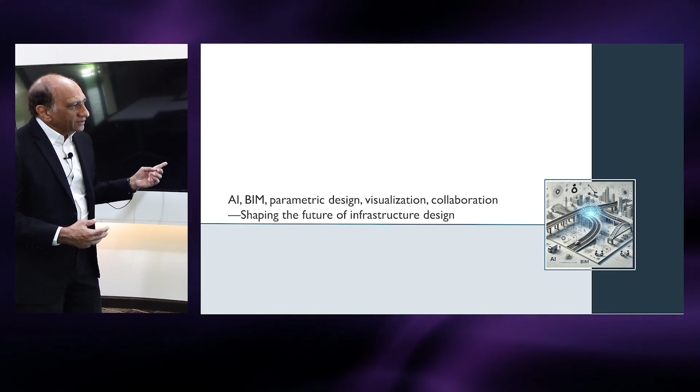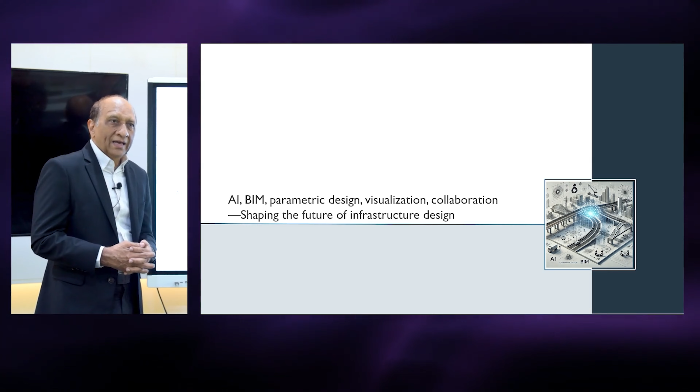For that, the key technologies that are now affecting all of this work, we can summarize them in AI. Of course, we all know that there's a big impact of AI right now. Building information modeling and also bridge information modeling, BrIM, both of them are important. Parametric design is very critical because now we have moved from traditional drawing-based models to parametric models. And then visualization of those models using digital technologies as well as collaboration with others. So these are the key technologies shaping the future of infrastructure design and, more importantly, bridge design, which is the focus of our talk today.

Now, bridges, as we all know, are an essential part of the infrastructure. In fact, probably one of the most visible parts of infrastructure, both symbolically and functionally, because whenever we have to cross any river, or we have to construct elevated expressways, or even for the waterways, we need bridges. So bridges are a very important component of physical infrastructure.

Now, a bridge project is a complex one, like any other project, but I just want to spend a couple of seconds on this one. If you look at a bridge project, we have to look at the construction method, the life cycle, the structural forms, the material, components, stakeholders, use of the bridge, and analysis and design, which is the main function of the structural engineers. And each one of them can further be expanded into more specific types.

So if you look at the entire project, it's pretty complex, and it is not practically possible to develop tools that will handle all of the bridges, of all of the materials, of all of the types, for all of the stakeholders. The system would become not only very complex, but not usable, because not everybody is handling all the steps at the same time. So that's why we will focus on application of the technologies on a specific type of bridge here, just to demonstrate how they are applied.

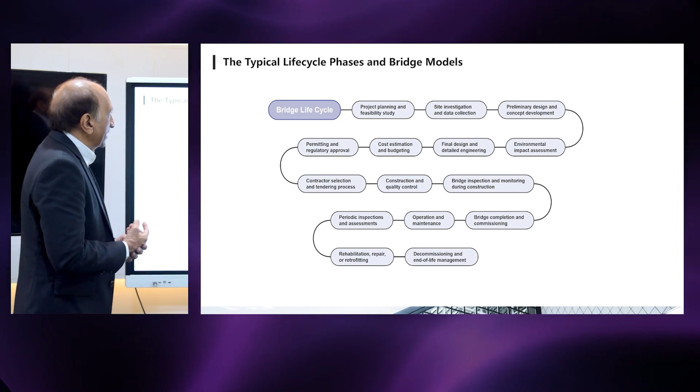Now, before we do that, let me quickly take you through the typical life cycle and phases of a bridge model, how it is developed. You can see from here that we start the bridge with planning and feasibility studies, site investigation, preliminary design, environmental impact assessment, detailed design, many approvals, construction, quality control, management of the bridge, and operation, as well as inspections and assessment. And finally, we may have to do some rehabilitation and end of life.

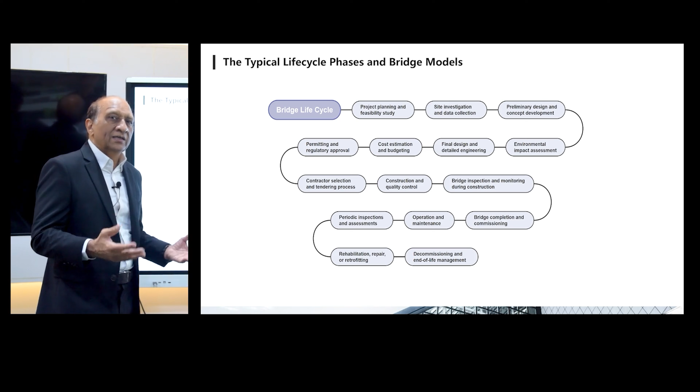So it's long, maybe spread over 100 years or more. So the bridge life cycle is pretty long, and most of these steps are integrated and handled by the agencies responsible for maintaining infrastructure.

And the design process, we can see that there are so many people involved in this one also. So the professionals and the stakeholders that are involved at every step are many, and all of them need to have access to information, and all of them add to the information, they use the information from previous life cycles, and they communicate, and they do their own part in the overall project.

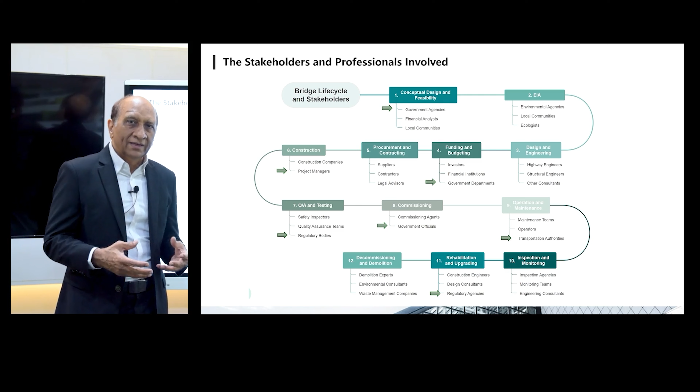So traditionally, there's a lot of documents that are shared both in printed form or in different documents in Excel, in Word, in AutoCAD, and in analysis models and in financial models. But ultimately, the information needs to be integrated. And now that we have this digital era, it's a great opportunity for us to build the entire information from a single model. So to do that, I want to demonstrate this on a simple bridge first.

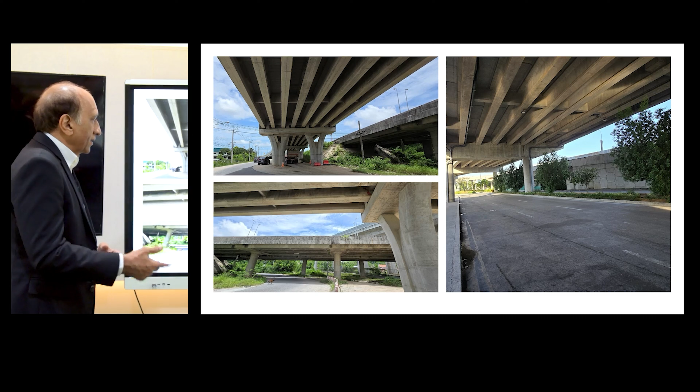And we are going to take the example of a concrete I and T girder bridge, which are very common. As you can see, when you travel around, you see these bridges, especially in rural areas and even in urban areas where they are used to build expressways and also waterways and so on. So we can see many of those.

Now, if you look at the design workflow for a typical bridge, you can see that we start with the alignment. That means it is given by the highway engineers. Then we have a design brief for the bridge. What kind of bridge? What do we want for this bridge to look like? Then system selection, and that is a very critical part. How do we choose the right system for that bridge? How many spans should we use? What girder types we should use, and so on.

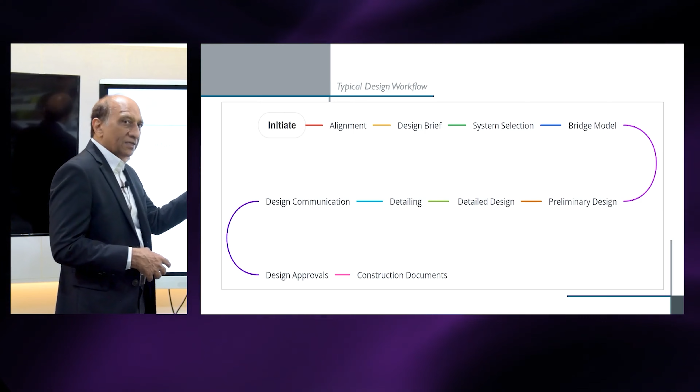And then we create a bridge model as a structural engineer and the bridge engineer. Then we do the preliminary design of the components. Then we do a detailed design. Then we do the detailing, reinforcement detailing, joint detailing and connection detailing. And then we communicate this information to the authorities, to the other stakeholders, to other professionals, and then we get the design approvals, and finally the construction documents are made and the construction commences.

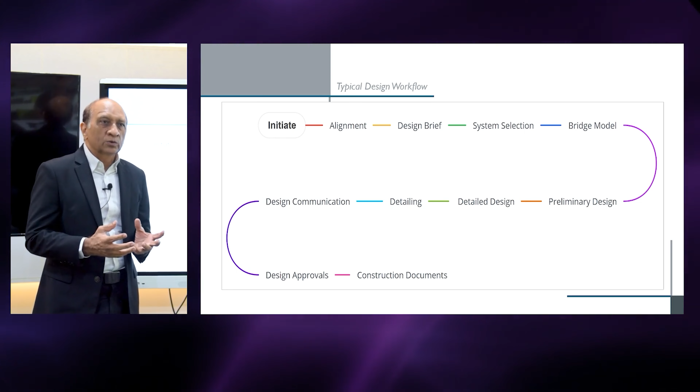So I'm looking at this design process, this workflow, which we can digitally integrate if we have the right information to start with. To do that, I will take the example of a new program that we are launching next month, and this is called CSI Bridge Express. So CSI Bridge is an existing program. In fact, it was developed about 20 years ago by Computers and Structures Incorporated in the US, and now we are working on the second generation of this program, in fact, adding on to that one, which is called Bridge Express.

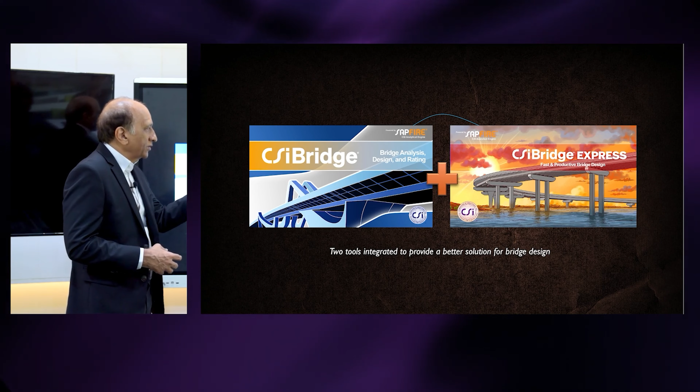And Express means that the workflow is faster and smarter, and these two programs can work together. They're about 20 years apart. This was in 2004, and this one is in 2024. So we can see how the technologies have changed. So let me start with this one.

The first thing that we need to do for this to happen is we must have a geometrically complete model. Normally, structural engineers start with a structural model, and that is not good enough to handle all aspects of the design because it doesn't have all the information. They only have the information necessary for analysis, which will be simplified and may not represent the physical character of the structure. So we should start with a parametric definition of the bridge, and that's the important part.

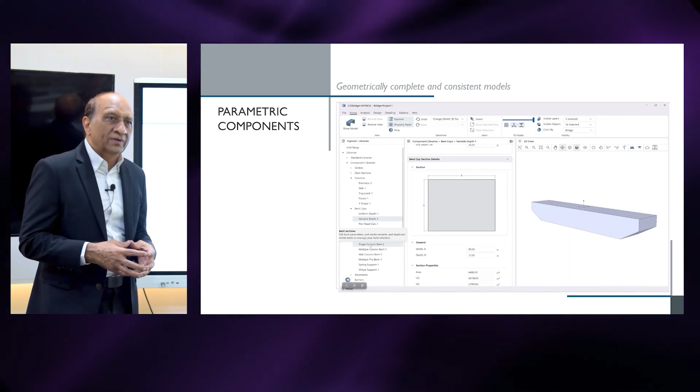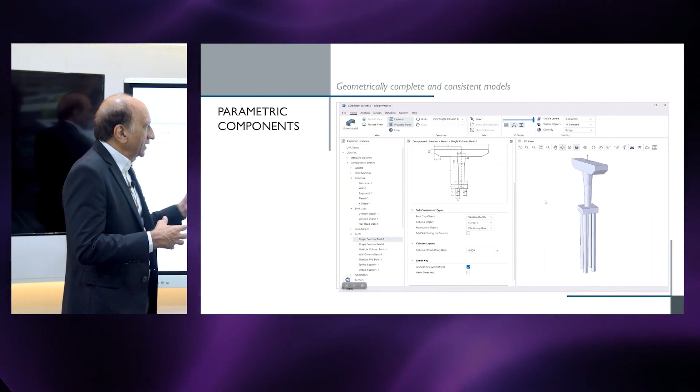So what I'm showing here is how you can define each component of the bridge using basic parameters, and then gradually use them to build up more complex components. So starting from the capping beam to the column, and then you build up the bents, and then you add the foundation. Various types of foundations can be modified. You can change the parameters, and everything gets connected.

So this parametric modeling is now quite common. There are many tools available, but here, instead of using external tools, we basically embed all of the parametric modeling into the program. So that's the first thing. The next one is that we use that information to create the whole bridge.

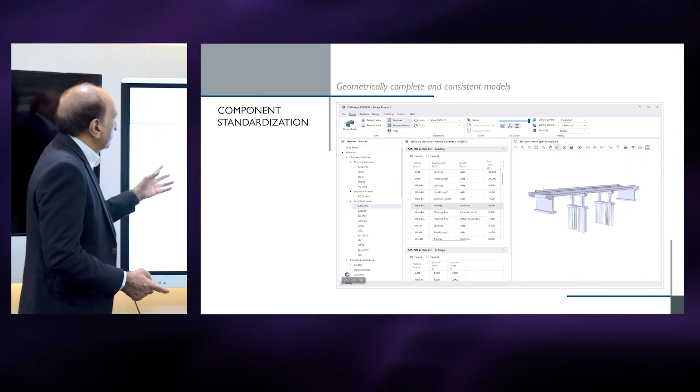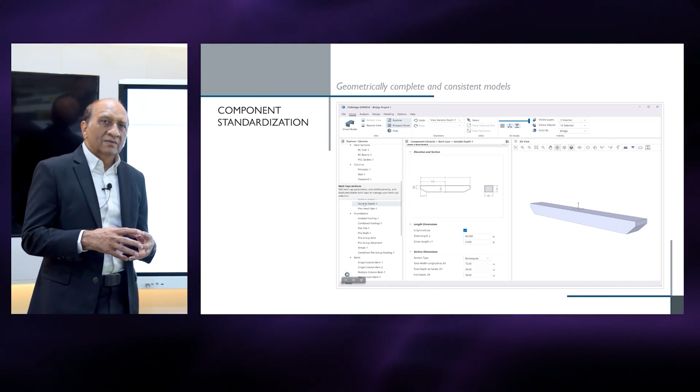So we can standardize those components, and we can save them into libraries so they can be reused. And that is the biggest advantage of parametric components, that once they are defined, they can be used across projects, across departments, across countries, across the various consultants, because ultimately there are not a lot of variations in most typical bridges. Of course, there are special cases where they can be modified.

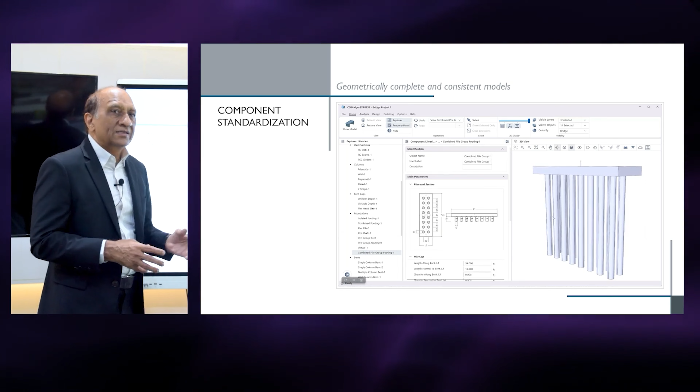So if a department is responsible for designing these bridges, they can accelerate the design considerably by standardizing them and saving them into the libraries, and then those libraries can then be used in the bridge. So like for example,

And then, more importantly, in the parametric definition, we can also add the reinforcement right from the beginning. This is a major change from the traditional design workflow where we wait for the analysis and design to be completed until we decide on the reinforcement. But as most of us know, we have been involved in design for a long time.

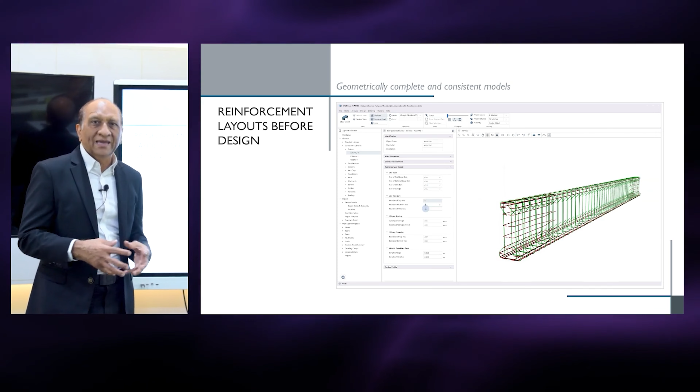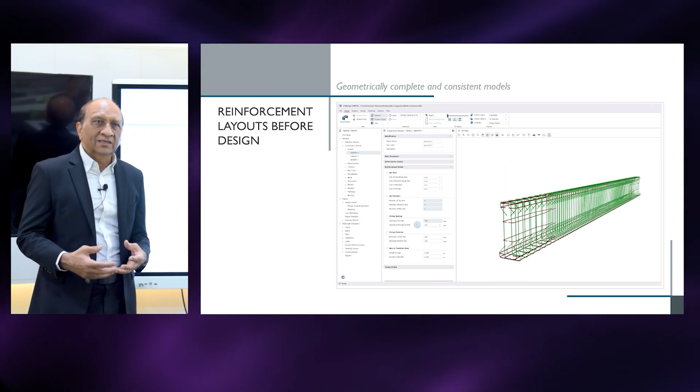We know that the reinforcement cage is basically a property of the component, and mostly it is governed by basic detailing rules. It is governed by the geometry. It is governed by the practicalities and construction practices. And of course, the reinforcement size, bar diameter, spacing will change, but the basic configuration will not change much.

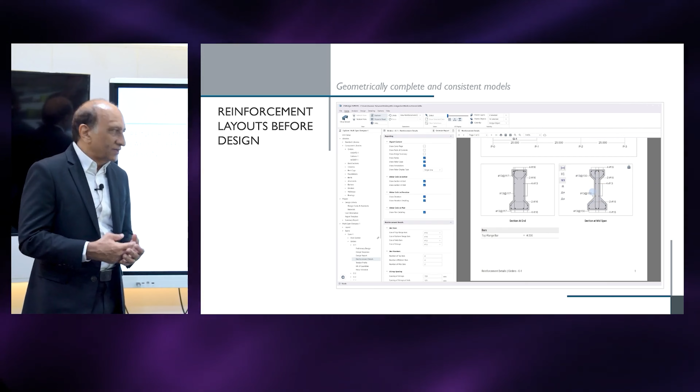So that's why we have added the reinforcement right into the component definition, so they are available as soon as the bridge component is defined. Reinforcement is all directly available. And then we can use all this information, the parametrically defined model components and the standardization, and construct a full bridge model very quickly by simply selecting the appropriate components on an appropriate alignment.

And we can just select what type of bent we use, and then what kind of bent cap we will use, what kind of foundation we will use, because it's all been defined and stored as parametric components. So we get the parametric models, and then you can see from here the abutments can be modeled, and we can complete the bridge by simply changing a few parameters.

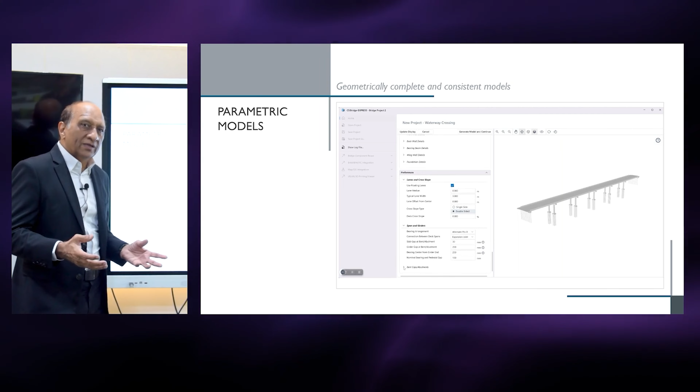This helps us to create a typical standard bridge in less than 15, 20 minutes. Of course, complicated bridges can be edited later, but most typical bridges will take a few minutes, less than an hour in any case, to create the model. And this is a much faster way than defining the models individually. So you can see it from here.

And another advantage is that once we create these parametric models, as you can see here, they're geometrically very, very complete in the sense that they incorporate all of the construction details right from the beginning, and they are transferred to the structural analysis model. You can see from here that we are modeling the bearings and the girders and the variations and the expansion joints and the half girders and everything, and then that goes to the analysis shell model or the solid model on the right hand side, which is geometrically consistent and complete.

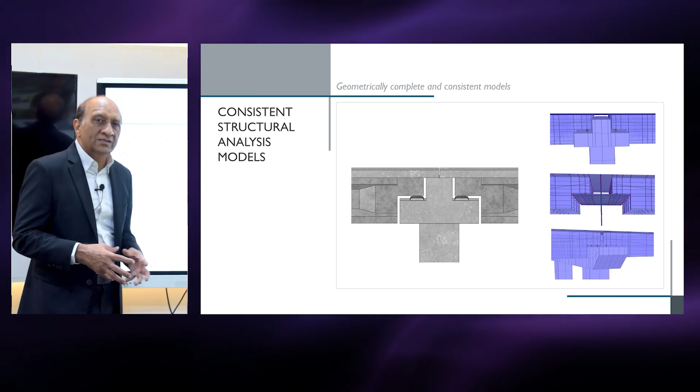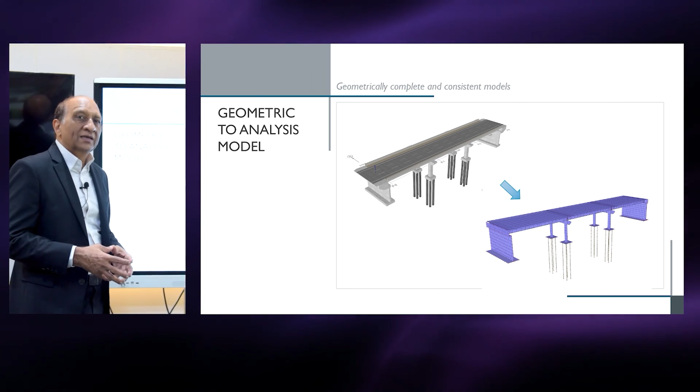And this is a big advantage of using geometrically consistent starting parametric models. And then we can have a whole bridge model on the top, which, as you can see, is rendered as a nearly physically complete model, and an analysis model which matches with that, which is automatically generated from the geometric model. And that's the advantage of using this parametric and geometric model approach.

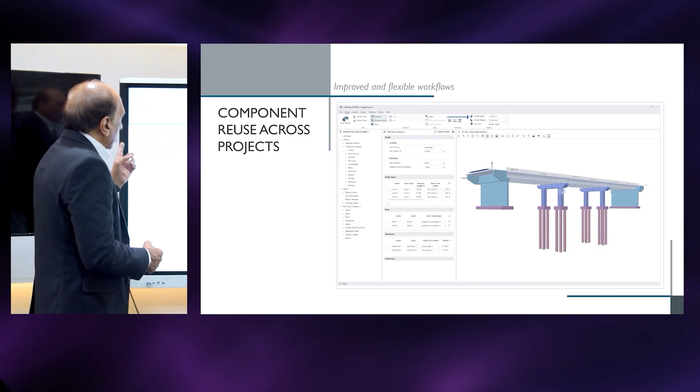Now, because of this, we can improve the workflow. And we can see from here that the first thing that will help us now is component reuse. I mentioned that we can define the components, and then we can create libraries, and there could be a whole library set for each type of bridge, for several columns, and we can just store them and those libraries can be shared.

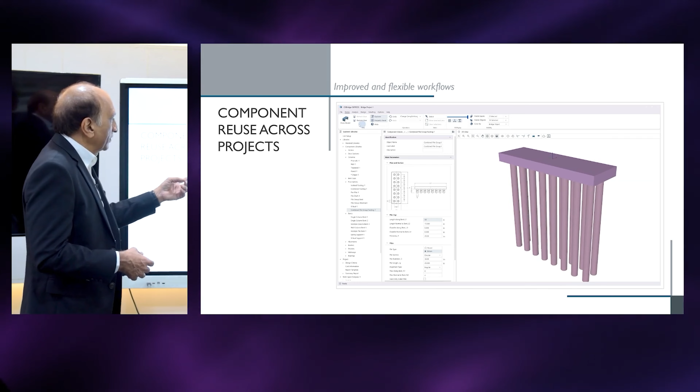And then, for example, we create a special type of foundation for this bridge, and then we export it and save it into a library, and this library now becomes available for other people to use. So we can save that, and we can see what are the components that we are going to save.

We save the library here, and then we can start a new project, and this is a new, different project, and we bring in those components just from the file, and then you say, okay, I want to use this component, and I want to use the bents from there, and then you drag and drop those bents into the new project here.

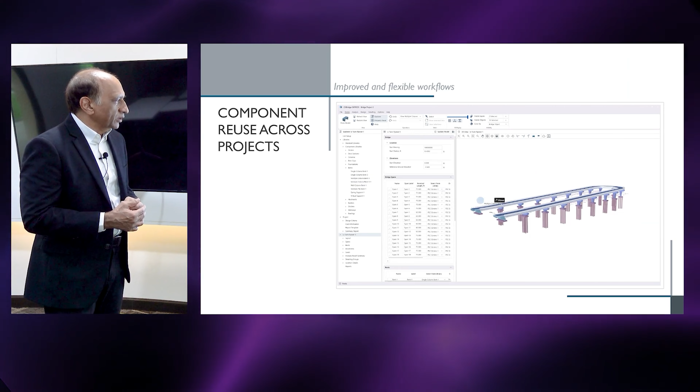This is a different project, as you can see. It's a flyover, U-turn flyover, and then you select the component that was defined for another project, and then you just drop it there, and then that component is updated. So this way, the component reuse can significantly improve the design process.

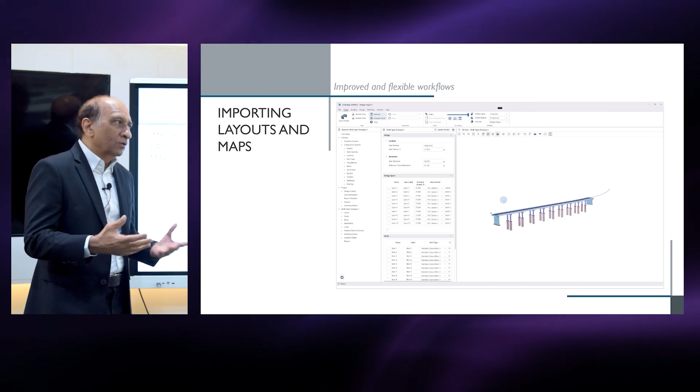And then another important thing is the layout. I mentioned that the workflow starts from the layout of the bridge, and if we have the ability to import the ground information, the site information, the layout information, and many programs have that, we can bring in the layout, and then we can simply place the bridge, which we can make a straight bridge first, and then just drop the alignment there, and then the bridge will adapt to that alignment automatically.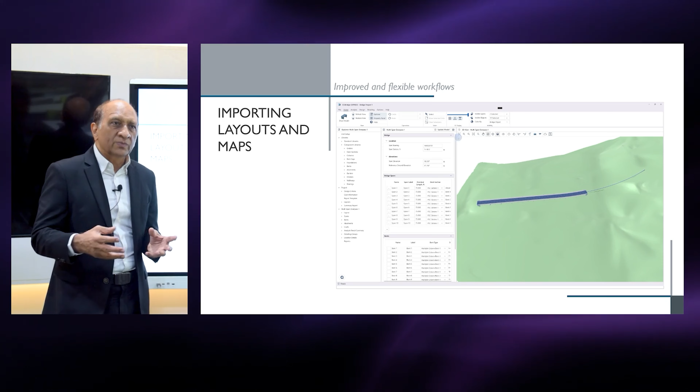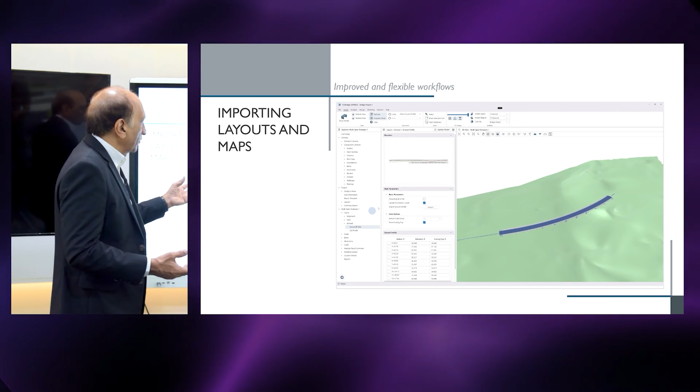And that is a great advantage, because we can create complex layouts very easily by first creating a straight bridge using these stations, and then just apply it to the alignment, and then automatically the foundations will be laid out under the ground. The ground profile can be extracted from there, and you can see from here the ground profile and the foundation layout can be done automatically.

So this saves a considerable amount of time in terms of creating the bridge models, and we can assign the geotechnical properties at each location, and those geotechnical properties will be automatically used to generate the soil springs for the modeling of the foundation and the soil structure interaction.

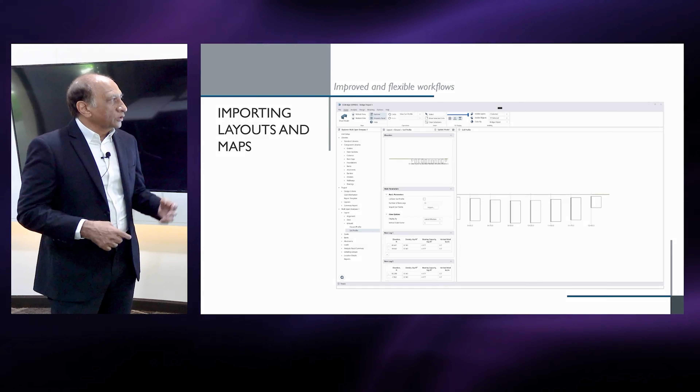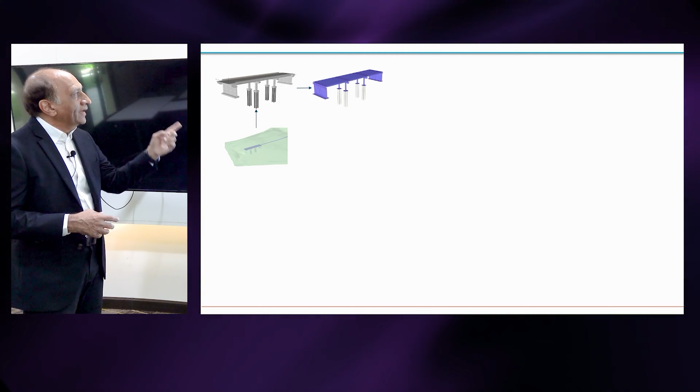So now let's look at the complete design workflow in a summary and how this will work. So let's say that we are starting from the ground, and then we create a model from there. And this is a very complete rendered model created in the same program, with the textures and all. And then you create a structural model from there automatically. The program will do that, and then we run the analysis, and you get the stresses and all of that.

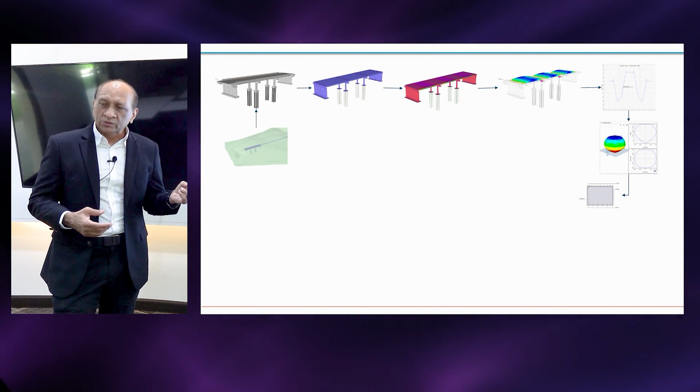And from the stresses, we integrate the stresses to get the response, bending moment and shear forces that are needed for design. And then we do the design, we get the bending moment, let's say on a bent, and then from that we can calculate for the columns, we can do the interaction diagrams, we can calculate the forces, we can calculate the capacity ratios, and then from there we can determine the reinforcement or update the reinforcement which is already there. And then from there we can go to creating a full rebar cage.

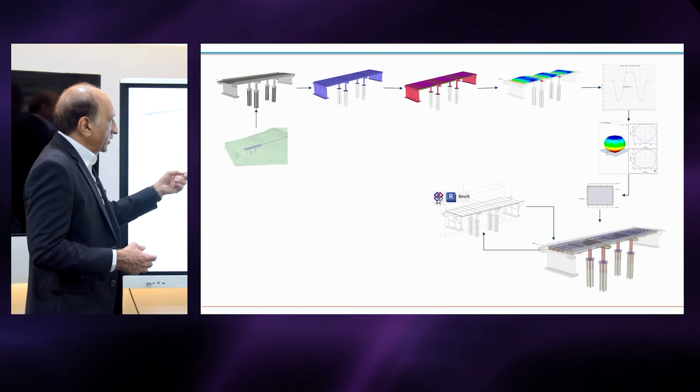And this is a huge advantage, because after we place the design, the entire reinforcement cage in 3 dimensions is already available, and it has already been updated based on the actual design parameters, and that will save a considerable amount of time. And then from there, we can transfer it to Revit or IFC for further communication or modification. And this is once again a very important part, as I mentioned, communication.

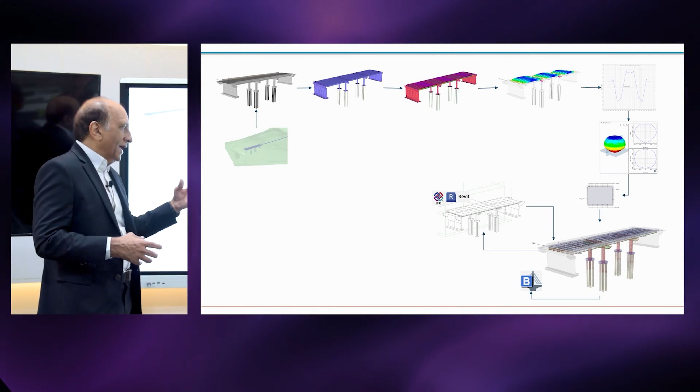And then we can also send it to the CSiBridge main, because I mentioned to you we have 2 parts of the program: the existing program, the big one, and this new tool, and they are integrated together. We can also create VR, virtual reality models from there. And I want to mention here that because our model is geometrically complete, we don't need a third-party tool to create a geometric model that will be suitable for virtual reality or augmented reality or mixed reality, because this model is already good enough for that.

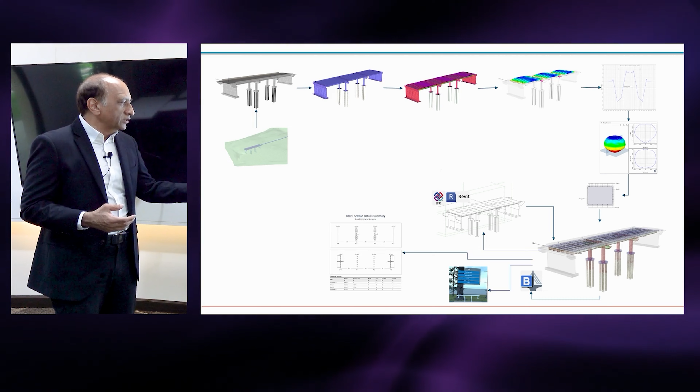So we create those models, and then we can create the summaries of the reports, and for the site layout, we can then also create from that the layout. We can send it back to Google Maps, and then we can place the bridge onto the map where we started from. So it's a map-to-map full integration in one workflow, in a single tool. I also want to mention that we can also get a very detailed calculation report with all of the formulas for the engineers who want to submit this for approvals.

They can directly submit the approval detailed calculations from that, and also more importantly, they can create the bill of quantities and cost estimates. And this means all of the items in the workflow are now complete.

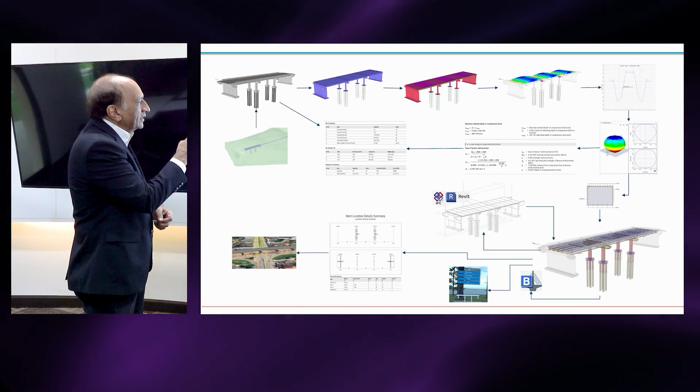I want to mention that this BOQ actually can be created without going through the entire project, because the reinforcement and the sizes are already available at the beginning. So a preliminary cost estimate, a preliminary BOQ could be created, which could then be updated and modified after the design cycle is complete. So this gives an opportunity for the engineers, the departments and the stakeholders to get a quick estimate of the bridge.

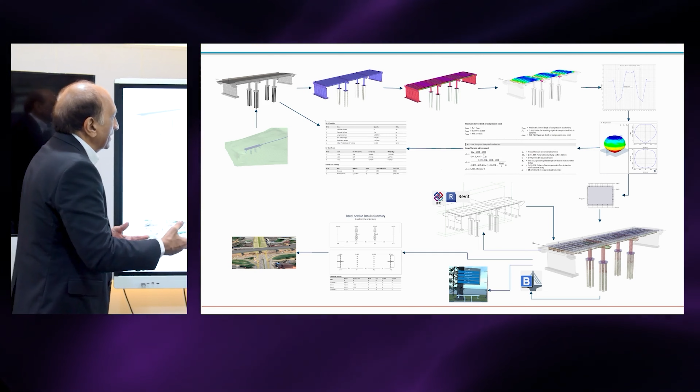So that is the complete workflow that I mentioned, that this digitization or bringing in many tools can help to streamline and make this much faster. So I just mentioned that we can have the BOQ before the design, and we can also have the BOQ after the complete design. I just want to emphasize this part because this is a very important advantage of using this kind of digital models.

And design communication, this is another part that mostly engineers are lacking, because our designs are not complete enough for the public or other stakeholders to make use of, because we are using structural models, shell elements, frame elements, load cases and all, which is not appreciated by other people enough.

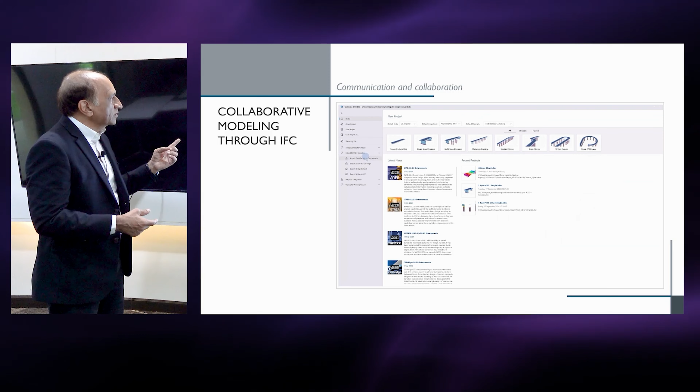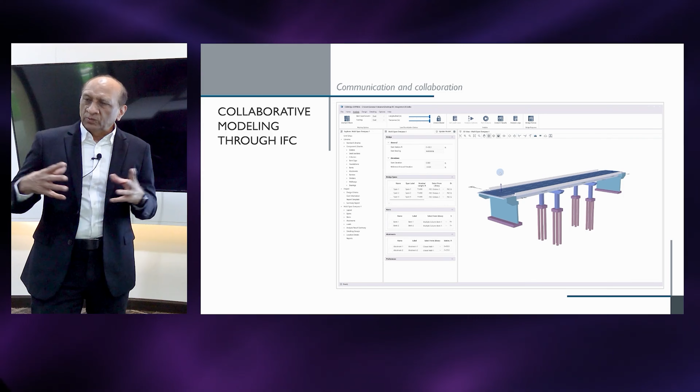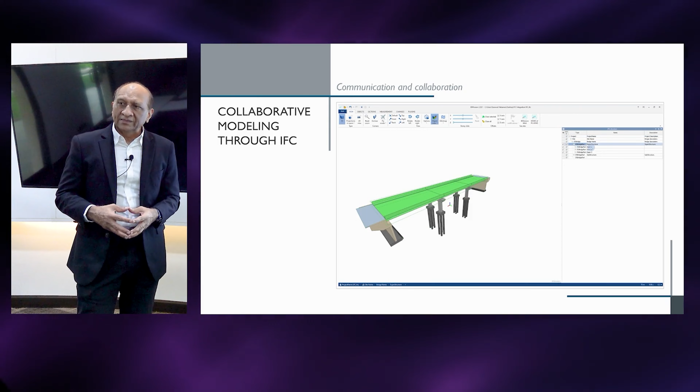So in this way, because we have a parametric model, we can actually do much easier collaboration. First of all, we can just export the model to various formats like IFC and Revit and so on, so people can import them into their system, and these will be completely geometrically complete models which they can use on their own side. So if you export that and open it in any of the IFC viewers, you can see here that the model looks complete. So that geometric model completely came into IFC, and from IFC it can transfer to any other software that supports IFC standards.

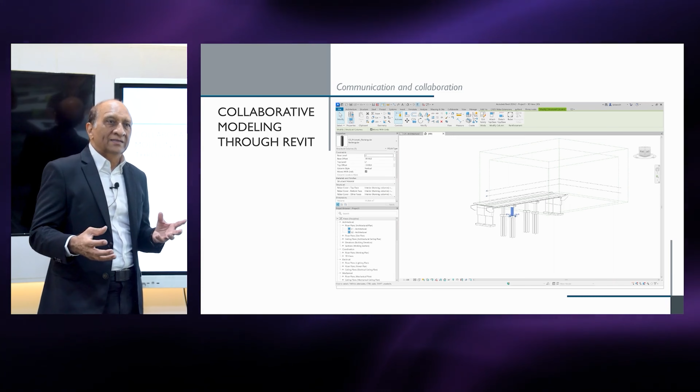Similarly, we can collaborate on the model through Revit, which is a popular tool similar to IFC. We can export the model to Revit, but the important thing is that these parametric elements can now be edited in Revit and brought back, because Revit also has the ability to define families and do parametric modeling. So our parametric modeling is integrated with the Revit parametric modeling through our own families there. So people can create the elements either in Revit or in our program and then communicate with that. So this is a major enhancement in terms of the Revit integration. You can see from here that we can modify something and bring it back. The next one is the sharing of the models.

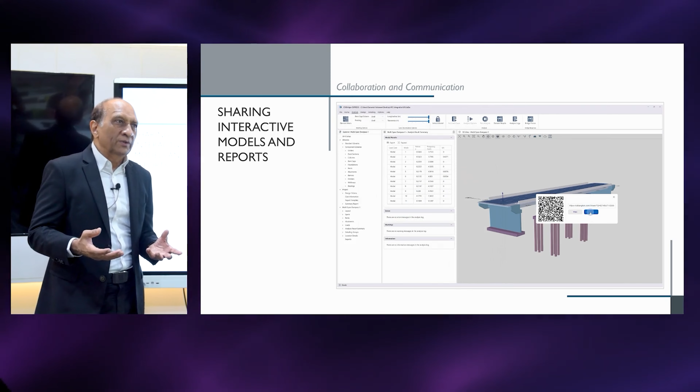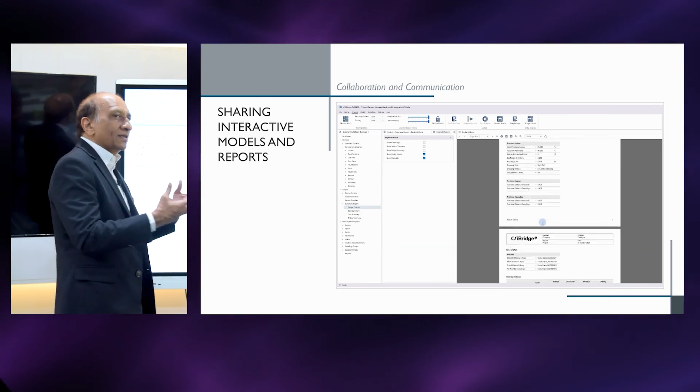One of the key problems that sometimes as engineers we have is that we do all this fantastic modeling in our tools like SAP or ETABS or CSI Bridge, but we can't communicate those models to other people who don't have that software, and they cannot appreciate the work that we are doing. So in this tool, you can simply share a model, a link or a QR code to anybody, and they can open it on a web viewer, so they can see what you see. You can also share the reports, so they can actually interact with the model that you have created, and they can comment on it.

And so this is a great way to share, to communicate, and also get feedback from stakeholders who may not know how to use this program or may not have this program with them. So that's a big advantage in collaboration and in communication.

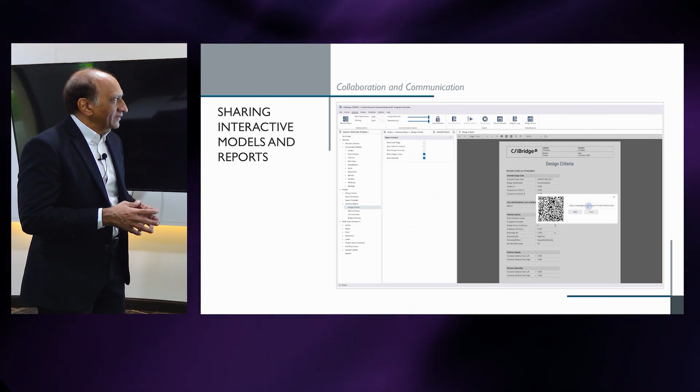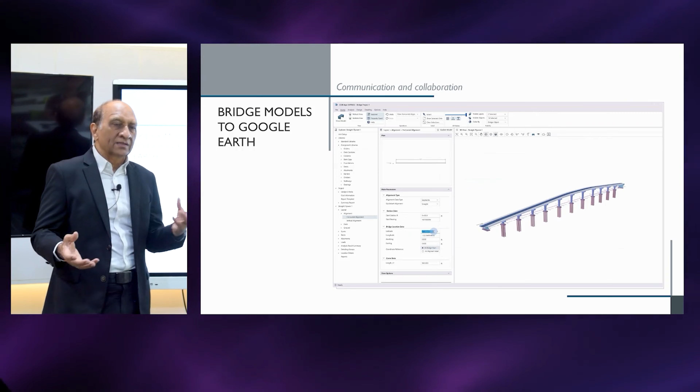The other one is, as I mentioned to you, that we can bring the models back to Google Earth, and that is mostly to communicate the final design to the public or to other stakeholders, to see how this bridge will look in the real environment, because now we have this Google Earth platform where everything can be viewed in 3D, and the buildings and other things are already there. So if you create your project and it's already a 3-dimensional, parametric, fully complete model, it can simply be placed back onto the... let me just forward this so we can see that the model can ultimately be transferred to Google Earth, and we can then see it finally.

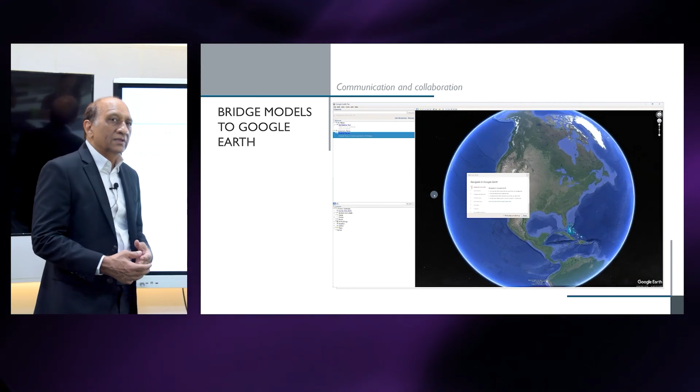And there is the model that we created onto Google Earth, integrated with the rest of the information. So this will help us to communicate our design with the stakeholders, and also check how it will fit with the rest of the infrastructure.

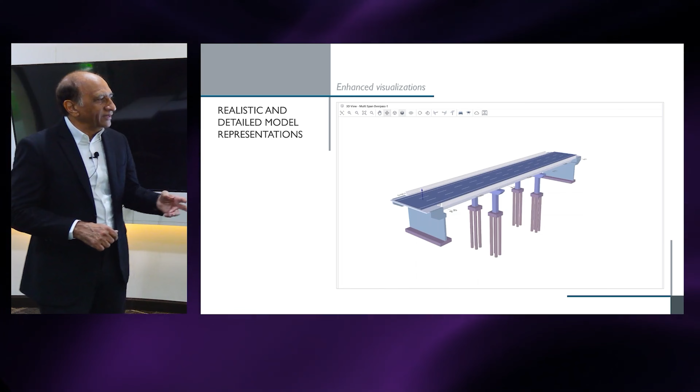Enhanced visualization is very important, because once again, as I mentioned, we have a very detailed model and we have digital tools. We have so many opportunities now to create enhanced visualization, in which we can see the model more clearly. So for example, we can view the model in textured view, in rendered view; we can zoom in and see the bearing and other details, because they're all modeled physically complete.

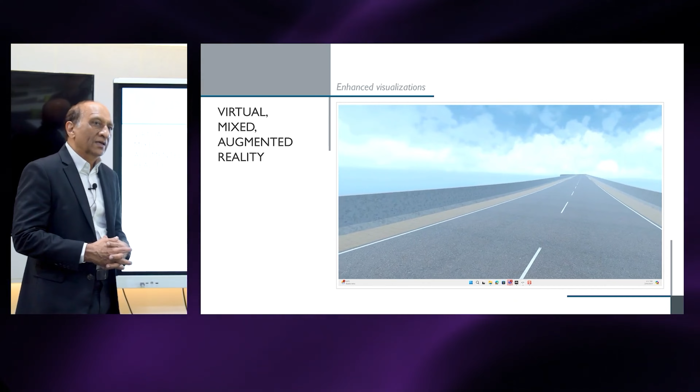And the next one is the use of virtual, mixed, and augmented reality. Once again, we can transfer these models into any of the VR, AR, or MR tools by uploading them to the servers, and then we can use any of the devices. So many devices are available these days to interact, and you can see the rebar cage, and people can actually physically interact, select, and also comment on these things.

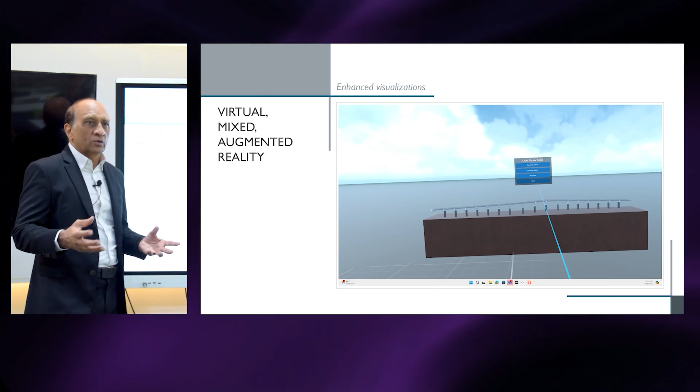And in a real VR cave, this could be done between a group of engineers or a group of stakeholders, where they can communicate through this immersive environment.

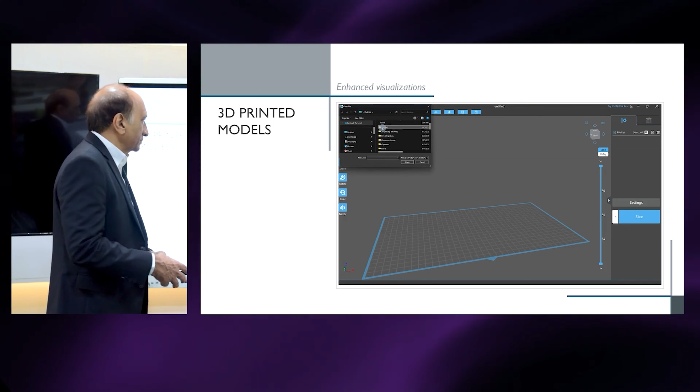And we can also do 3D printing of the same model, because once again, as I mentioned, this is a complete model. So we can just select any component or the whole bridge, do a 3D printing, and physically interact with that model. And this model can then be sent to any of the 3D printing devices, as you can see here.

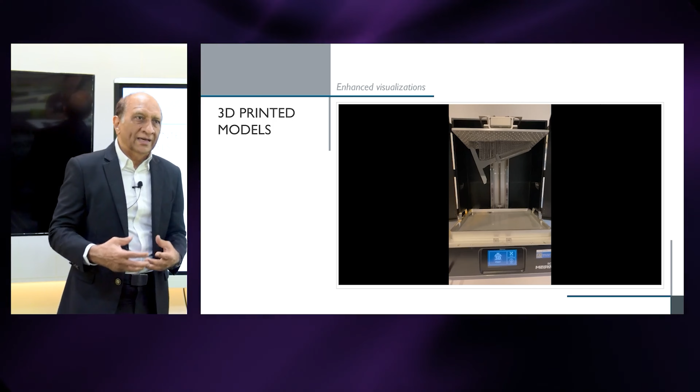And now 3D printers have become very comprehensive. They can print whole models in different scales and different levels of detail. And so we can study physically, see how the structure looks, how the components look and fit together.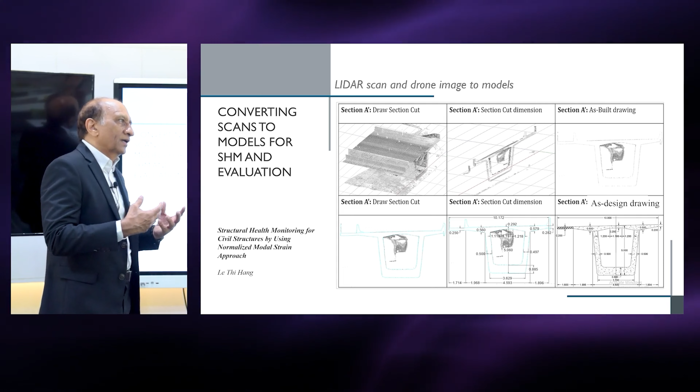And because now we have parametric models, the LiDAR models can be directly converted into a physical model through AI interpretation, and also by physically connecting them together. This is where you can see the LiDAR model can be converted into a cleaned-up model, removing unnecessary parts, and it can probably give us the parametric model directly from the LiDAR model. So this is ongoing research that we are doing now.

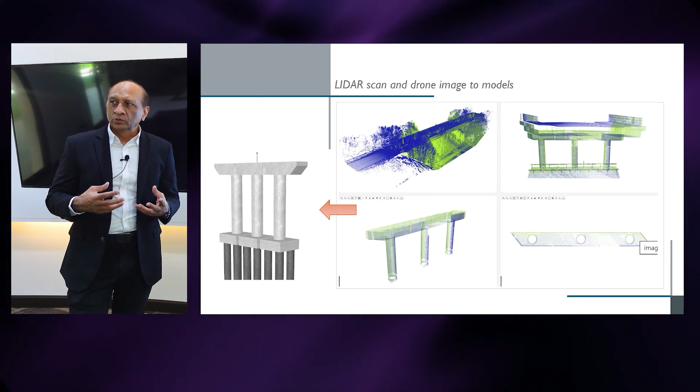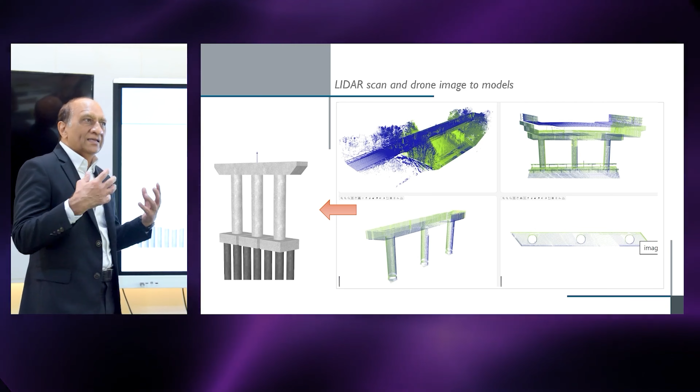So this will help us a lot in documenting and creating digital models of existing structures by simply using LiDAR or drone scans and getting a proper parametric model which can be used for other purposes.

Now, the last item on the list, of course, is AI, and AI is everywhere. So we cannot ignore it in our profession. AI can be used in a number of ways in structural design, especially talking about bridge design in the current context today. I'm going to present three ways that this can be used.

The first one is that it can do the help, an ask-me kind of thing, like ChatGPT or other language models. It is trained on the documentation of this program so that it gives you specific, detailed answers to your queries, going through all of the documentation and the program itself. So you can ask many questions and it can give you a relevant answer. For example, what types are available, what I can do.

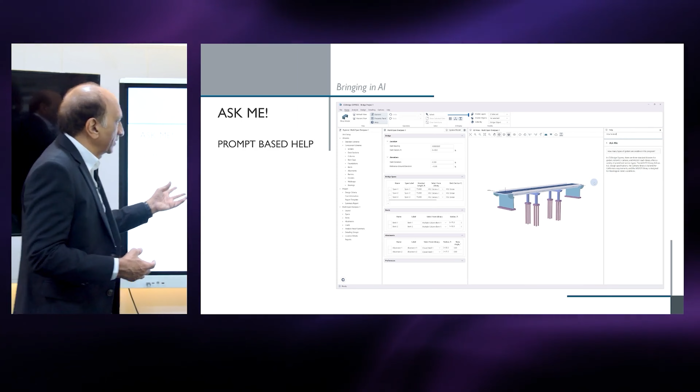So instead of giving you just the link to the help topic, it actually summarizes and helps you. So this is a good learning tool and also a quick way to get the information that you need without having to read a lot of irrelevant information.

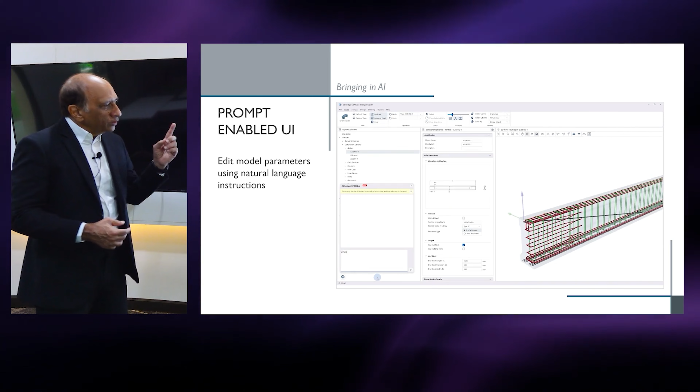The second one is the prompt-enabled UI. Because it's a parametric model, we can use natural language instructions now instead of entering the data individually. So we can, for example, say change this type, and it will be done, or say change the number of bars from this one to this one. We type it as a text prompt, and it will find the appropriate parameters, put the data, and update the model.

So that's the big advantage of using this AI, that we can use prompt-based editing now, and this will really help a lot because people don't need to get trained in the program use and don't have to learn how to do things. They just have to type, and the program will find the appropriate data and update that.

Now, let me look at the last item on this presentation. It's the application of AI, similar to what an experienced engineer would do. It's like a back of the envelope kind of design. If you're in a hurry, you can create a quick model using all AI prompts without doing any work on the program itself, and get a basic design done for a quick answer, preliminary design or cost estimates. So let's look at this example.

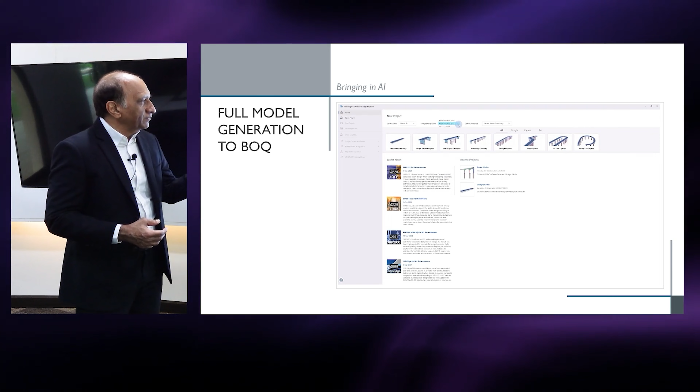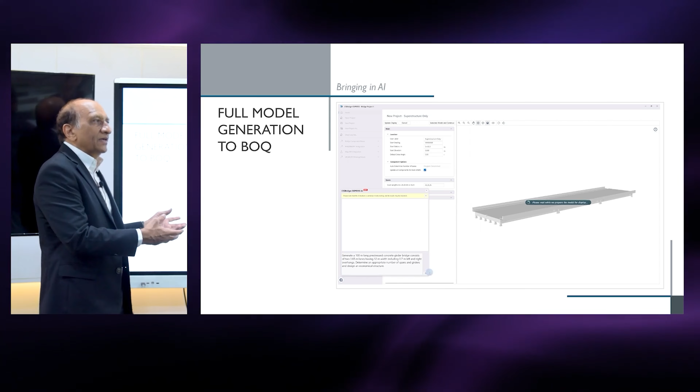Here we are going to start with a new project and select the appropriate codes, and then say, okay, give me a bridge with this much length, with that many lanes, and give me the most appropriate number of spans and number of girders. The program, trained on previous data, will then find the appropriate structural system to fit this width and length of the bridge, and come up with a basic design of the deck. So that will be the first part. The deck design is done.

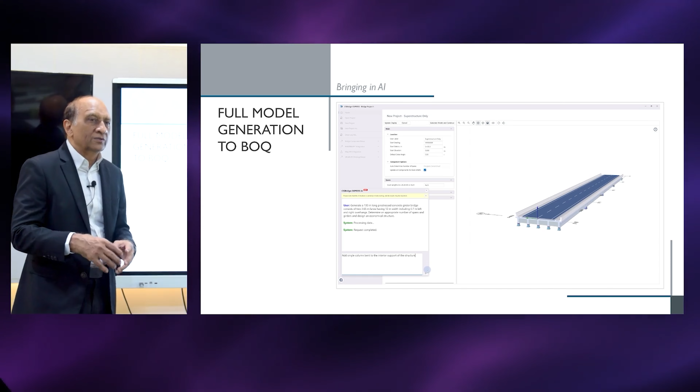Next, we can continue to say add the supports. Now the superstructure is done, based on AI training. And then you say, okay, I want to add this kind of support there. So the supports are added. Once again, we are not interacting with the program, just adding the prompt. Then we say, okay, now add the abutments, you just type the type of abutment, and it will fit the abutment to the bridge that you have already done.

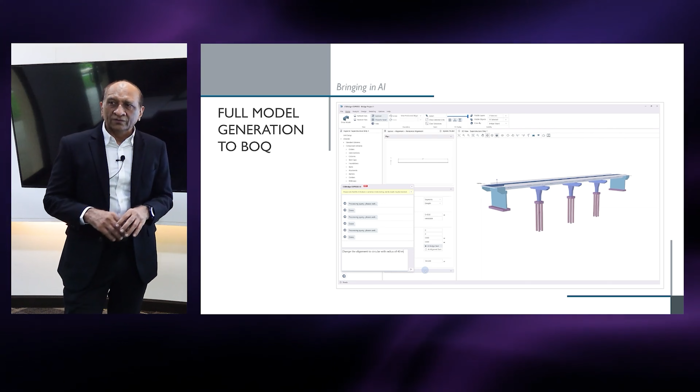After that, you say, okay, I want to change the alignment to be a curve. This is a curved bridge, not a straight one. You just instruct the program, change this to a curved bridge, give the radius of the curve, and we should have the bridge curved that way. So now we have the curve. And let's say it's a ramp and it's also a slope. So we can change the profile of the bridge and say, elevate the bridge on the right-hand side by a certain meter. Once again, it's all happening through a prompt.

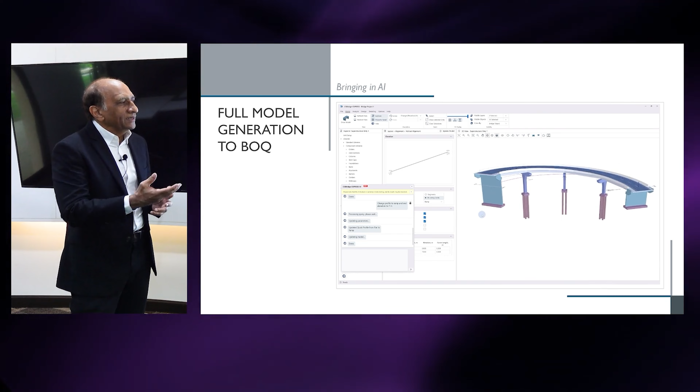Combining the AI training plus the prompt-based editing plus the model generation, we can now very quickly get a bridge model in less than 3-4 minutes. This is almost real time; this is how much time it will take to create this model. And once the model is done, you should be able to run it, design it, and get the BOQ.

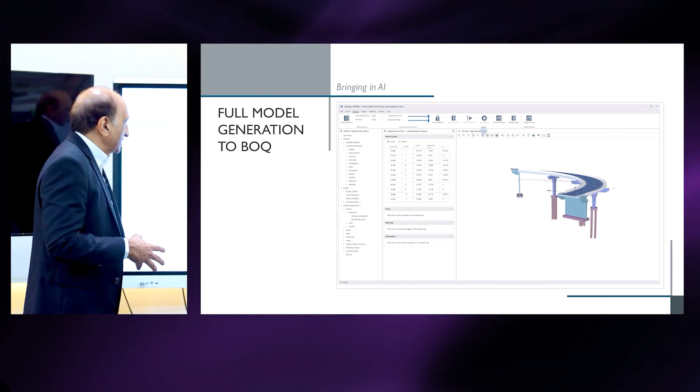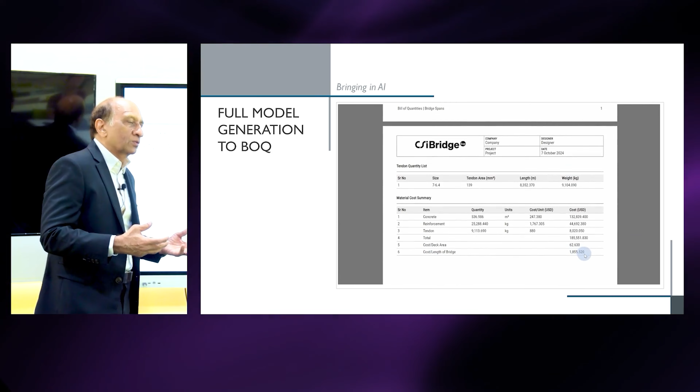You should be able to do everything on this one, because the rest of the process is pretty automated. So you can get the bridge response. You can see the bending moments. You can get the initial periods and frequencies. So without touching any of the data, using mostly AI, we are able to get the BOQs, the layout and the cost of the bridge in less than 5 minutes for a quick design. That is what we mentioned in the beginning, that we can accelerate the whole bridge design workflow using various technologies by digitally integrating everything.